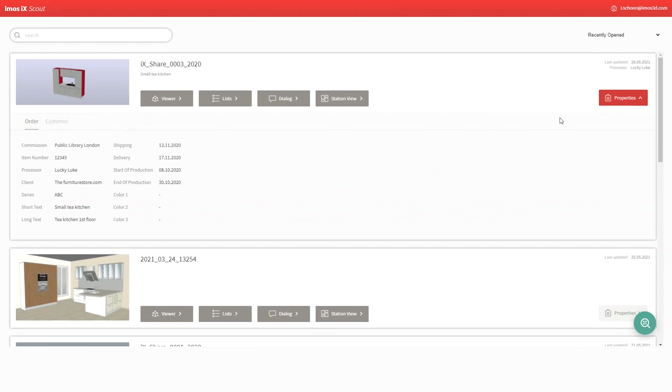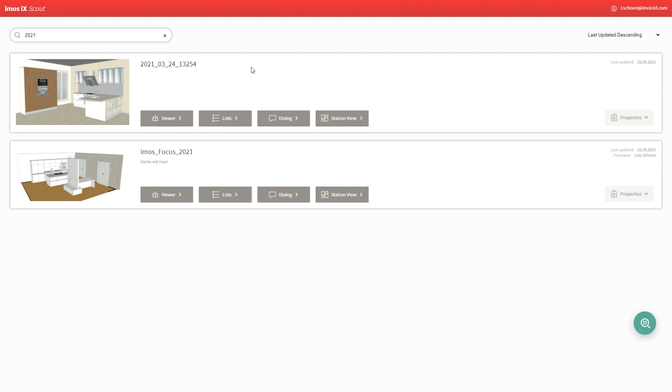And we can sort this list by multiple options here. If I say last updated, for instance, I can rearrange the whole situation here. If I want to retrieve specific information, I can also utilize the search function here. I can just type in whatever content is present and it will give me the result needed.

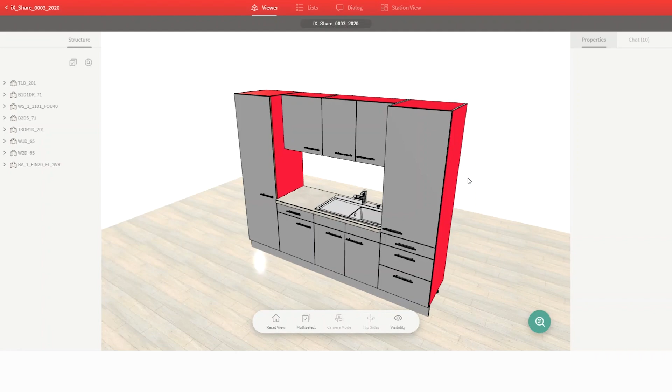Most importantly, this is the start page for the navigation. So from here I can access all the other components within the application, starting with the viewer page. The 3D viewer page gives me, first of all, a 3D model of the whole construction. Down here in the bottom, I have a navigation menu.

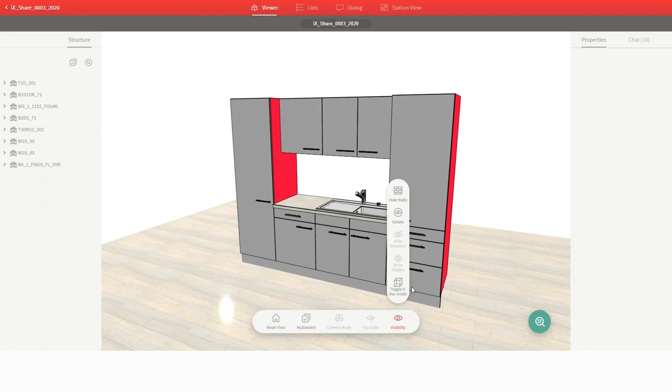I can influence the visibility of walls, for instance. If I pick a part or an article, I can isolate it, hide it, or I can toggle into an X-ray mode. This could be very helpful for assembly, for instance.

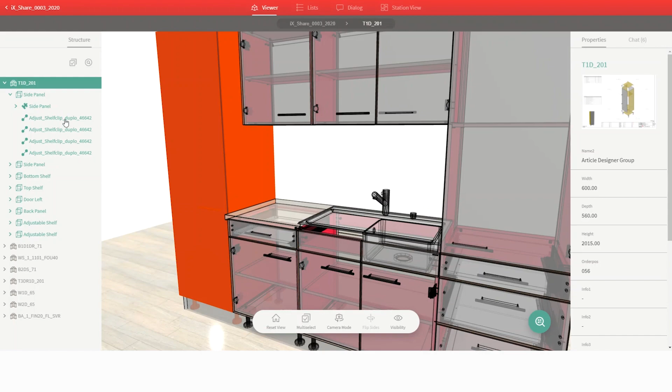On the left-hand side here, we have the tree view. The tree view represents the content of the order, very similar to what we know from the Explorer in imos CAD. And here it's basically exactly the same way, all the way from the top, from the article. Next we have a list of assemblies within the article, and within the assemblies then hardware, single parts, and in the part material, edges and surfaces. If we provide CNC data also, then of course this is part of the single parts as well.

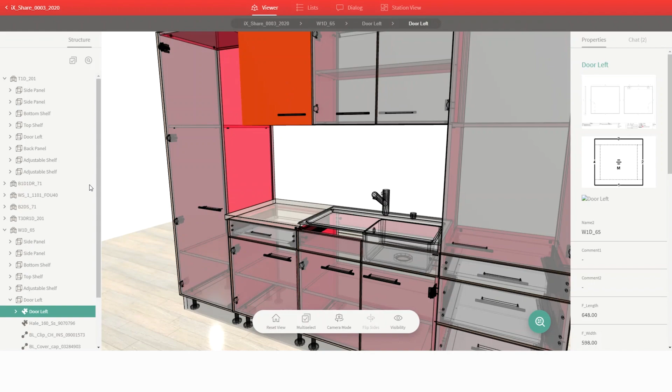As you can see here, these two areas communicate with each other. So if I pick a part in the 3D viewer, it's going to be highlighted in the tree view, and vice versa. If I pick something in the tree view, it's going to highlight it and pick it in the 3D model.

On the right hand side here we have the properties sidebar. The properties sidebar doesn't really interact with the other two. It just follows whatever is selected and gives me all the information about that selection. So if I select an article here, for instance, it gives me a list of properties from the article. If I select a single part, I will get all the information about a part.

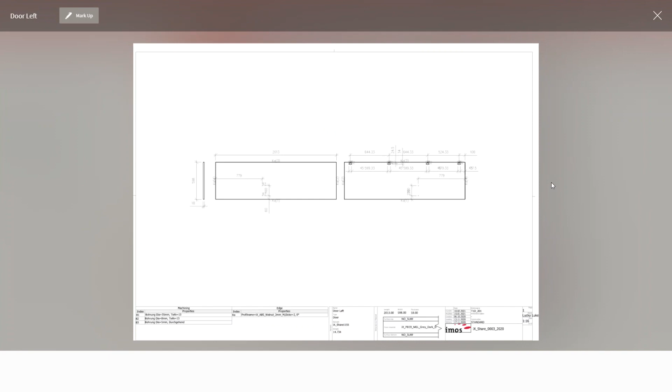On the top portion here we can see a small preview of whatever content is sent with that item, that's available for articles and single parts. And here, for instance, we have a document manager output and our edge drawing here. And if I click on it, it's going to enlarge in an overlay and give me all the details I need. In here I can zoom in, I can pan around and navigate exactly to that information I need.

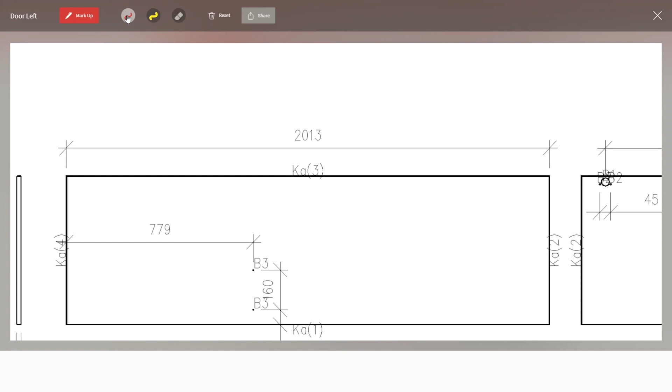So here we have the first function of paper we were talking about earlier. We have the markup function that gives us a selection of a red marker or a text marker. And depending on which we select, we can either mark or highlight something. And if we want to use this as a basis for communication, we can use the share button and use the integrated chat functionality to send it to our colleagues to ask something, to clarify something about this detail.

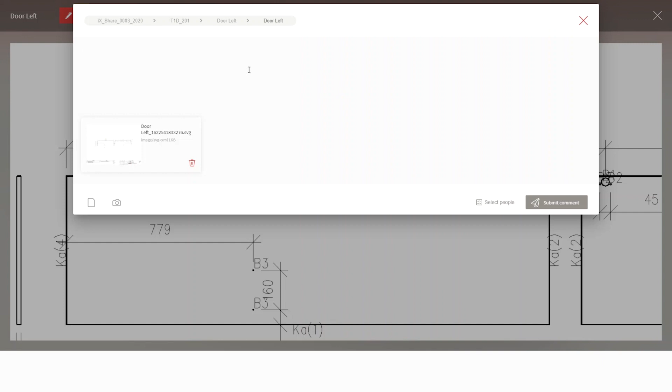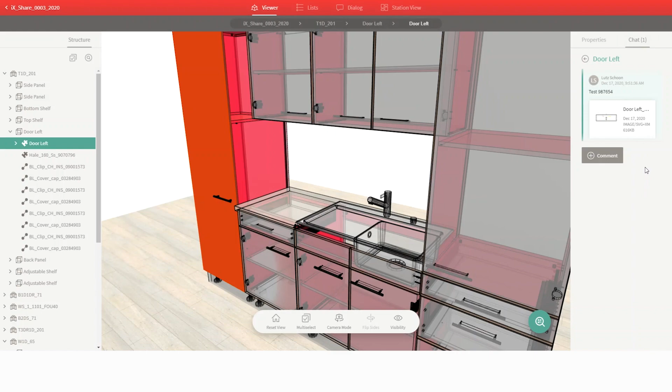The chat functionality is embedded not only in this overlay here. If I close this down again, I can see the sidebar on the right hand side here is divided into two portions. We have the properties portion, and then we have the chat right behind it. And if I activate the chat, I see all the communication about that particular part I just selected. So if I don't select anything, you can see that little indicator jumps to 10, meaning there are 10 items within this order that have communication.

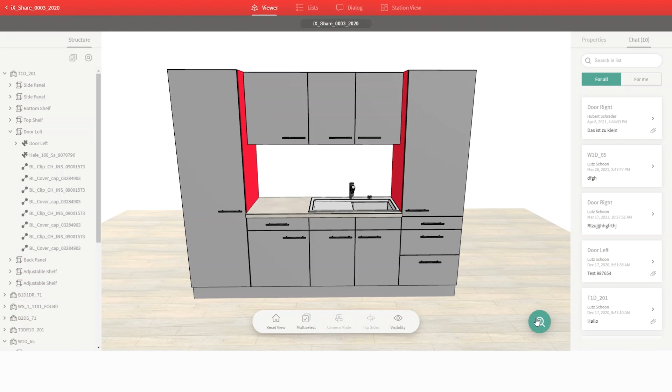As for the navigation, this would be a bit tricky in a productive environment. So in a productive environment, we want a fast and easy navigation. And for that, we have the scan button down here. So instead of navigating our way through by hand, we can just simply hit the scan button. That will activate the device camera. And let me show you in a quick live demonstration how that works.

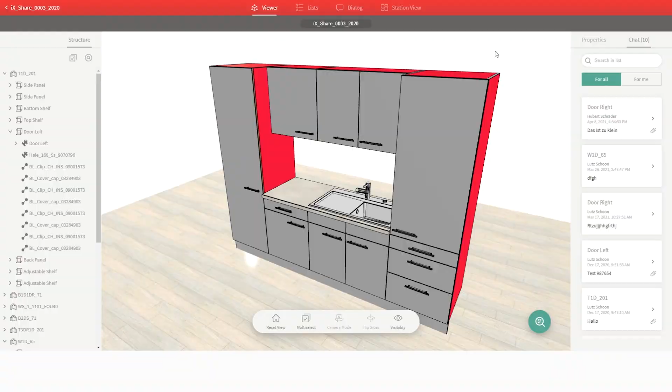As noted earlier, we reduce our paperwork to a label on a part and a device that reads the QR code and displays all the information. So all we need to do in a productive environment is activate the scanning functionality from any random order. So if a part comes along, I don't really have to access any order. I just activate the scanning functionality, match the search box with the QR code, and it's going to load first of all the order and then the part in the order and give me all the information needed right at hand. So to display a larger area, we can click on the sidebars and maximize the 3D area. And that way you can see we got all the information we needed just after scanning.

Next up is the list page. The list page provides us a number of useful lists for a productive environment, all the way from cutting, edge banding to purchase parts and articles. And this page gives us not only information but some functionality as well.

On the left hand side here, as an example in the cutting list, we see our quick filters. And these quick filters are present in most lists, with a different content, of course, depending on the list we're in. And one scenario, for example, is we are the person on the saw. We receive a specific material we want to cut. So by using the quick filter, I can reduce the list to whatever I have at hand and reduce the information to what I really need.

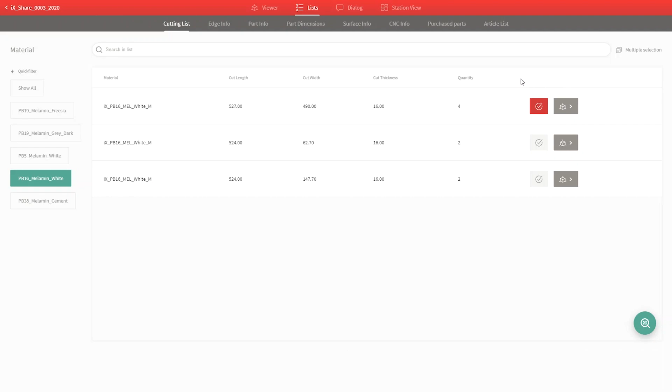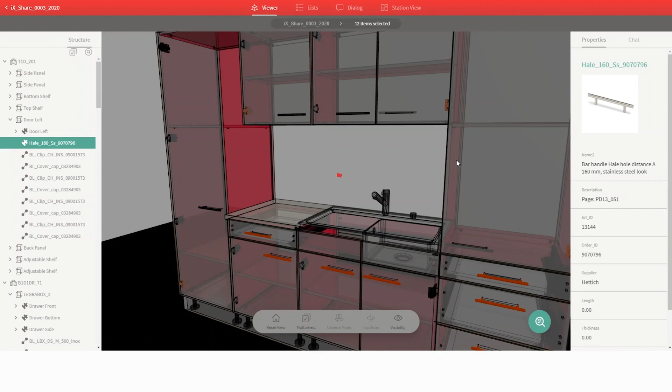The last button here is again navigation to the 3D, so it all boils down to the visual context of the information at hand. For this, I think it's more useful to go to the purchase parts. So imagine you have an item, for instance, a piece of hardware, you need to know where it belongs to. Let's take the handles, for example. We can navigate back to our 3D viewer and it will show us exactly where these items go. This is extremely useful for assembly.

Next in line is the dialog page. The dialog page contains two areas. On the top half here we can see our attachments. So attachments means the person who uploads the order to iX Share has a possibility to extend the content from imos-based data to basically whatever we want to provide to the crew on site or in production. Meaning everything that can be opened on a device like PDF, any sort of images can be stored there, will be automatically uploaded and then placed in this area here.

And then if we click one of these, we can retrieve and open this attachment here. And here we see it's, for instance, an assembly instruction for the hood.

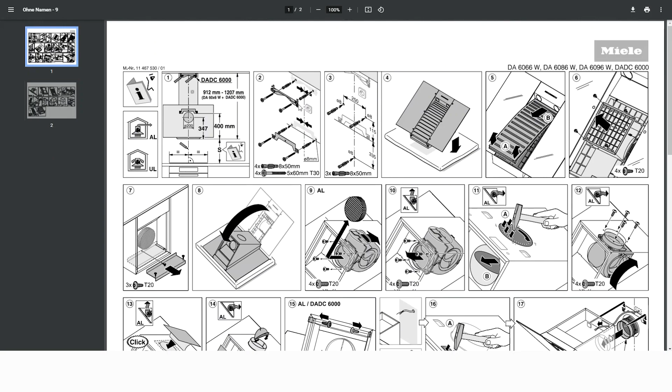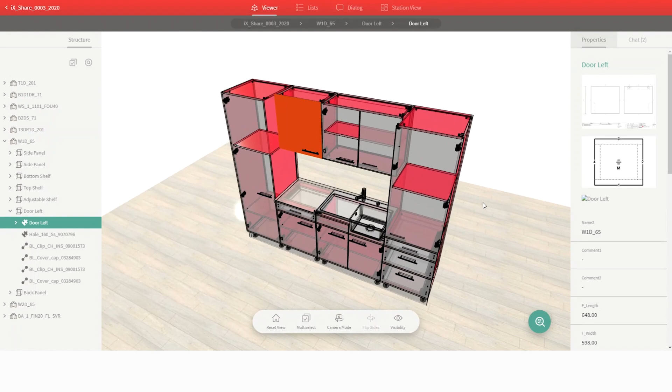I can then either use the comment button to answer to the last message, or I can use the preview button if I'm not sure which item is really the one that is meant here. I can use the preview button to navigate back to the 3D viewer, and then I'm really sure which item is the context of the conversation.

Last but not least, station views. Station views gives us the possibility to customize the view of everything we just saw. So meaning I can put together my own view as an iXScout user. To show you an example here, I created a view for assembly. In assembly, I don't necessarily use the information about each and every single part, but I want to know how to put together a piece of furniture.

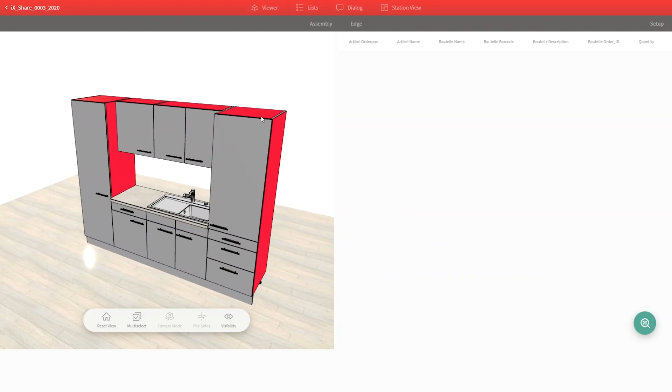So the 3D viewer here, for instance, reacts not only to the single part, but regardless of which part of a unit I choose, it's always going to highlight the entire article. On the right-hand side here, I have a list of all the parts contained in the article, as well as all the hardware used within the article.

So how is this done? If I quickly show you the setup here, I can first of all choose a number of layouts here. Once I choose a layout, I can fill it with content. If I click here, you can see I can choose the component I want to fill in. And if I go to this here, for instance, I can then create content showing details about the selection.

As a second example here, we have the edge banding station. Here we click on a part, we see our preview showing us the transitions of the edges. And then up here we have a small list showing us by sequence which edge to apply to which edge.

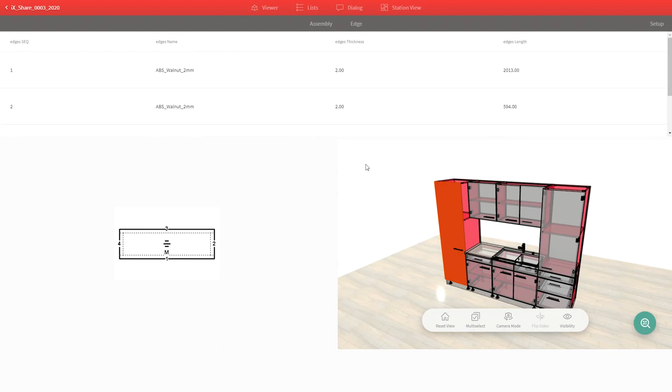So, I hope you enjoyed my brief presentation of the new product and could also see some of the features for yourself and see how you could use them. iX Scout will be available as of 2022.